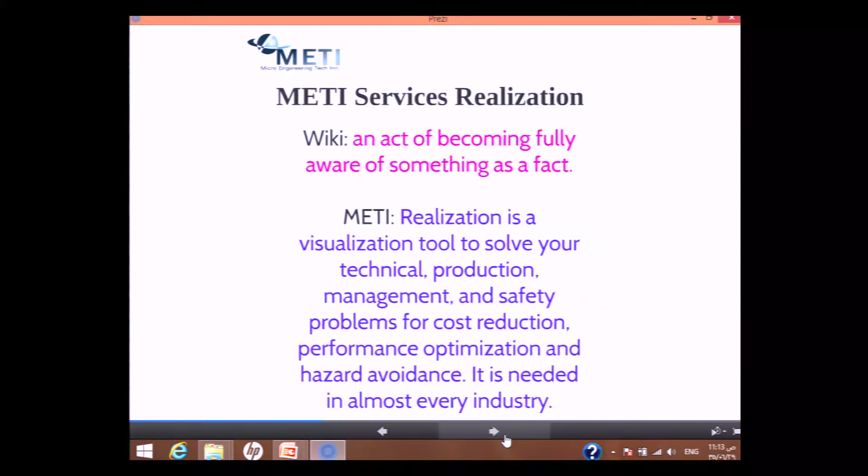So everyone is looking for mapping and data acquisition. They're looking for information, looking for facts. This is the reason we started thinking that the new trend in GEO should go in the direction of realization. To really do proper realization, you have to have the right knowledge, right tools, sensors, and accuracy. Going back to Optech, as Michael said, we're looking for accuracy from LiDAR and imaging. So METI's definition of realization is visualization to solve your technical, production, management, and safety problems, for cost reduction, performance optimization and hazard avoidance for your engineering projects.

In terms of industries, we are active and operating in North America, mainly Canada's West, Central and East, North Africa, and the Gulf area, and we already have existing clients in Saudi Arabia.

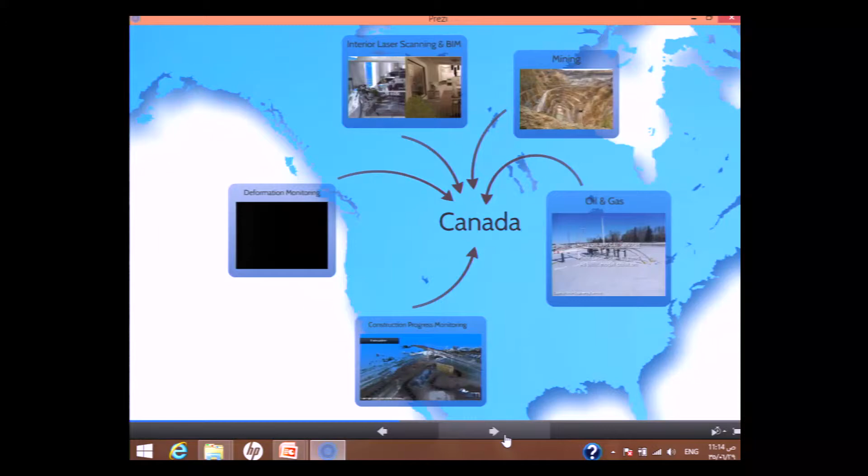In Canada, we are really focusing on five different industries: interior laser scanning and BIM, the new trend in interior design and architecture; mining industry; oil and gas; highway engineering; and monitoring progress, earthworks, and deformation monitoring.

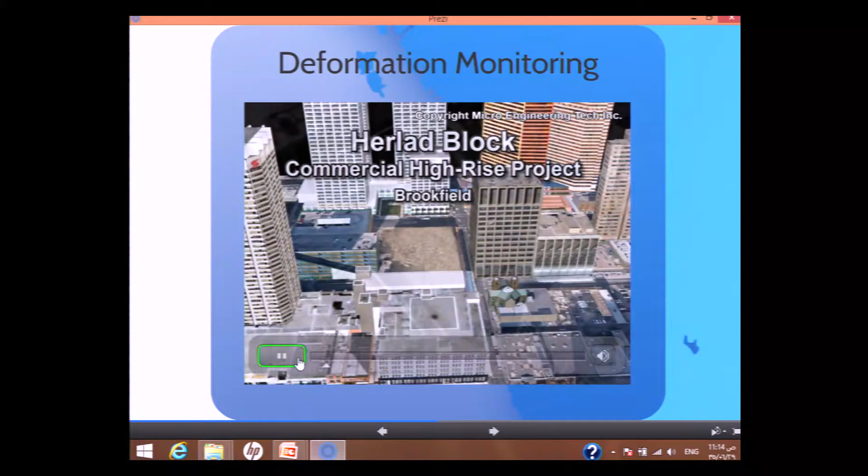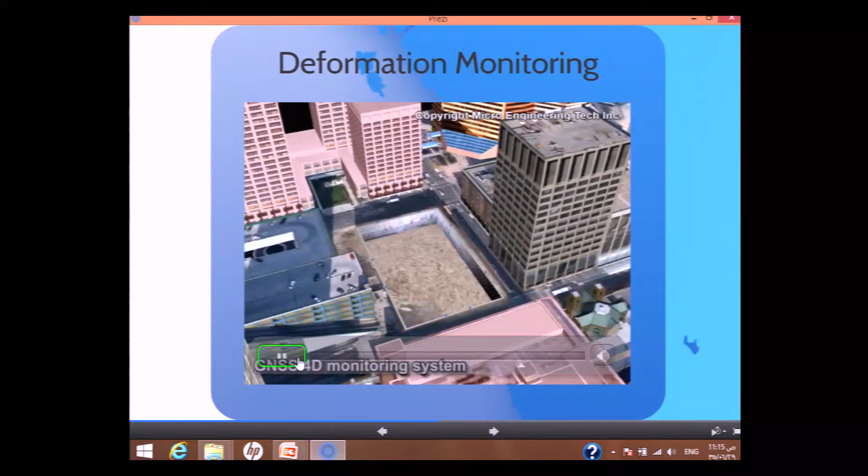I'll pick three of the industries we're involved in. Mainly, one of them is deformation monitoring for high-rise buildings. We are proud to be controlling and monitoring the highest 3 buildings in Western Canada. If you just Google the tallest skyscrapers in Western Canada, we were monitoring and providing precision engineering through integration of laser scanners, GNSS, geotechnical sensors, and robotics. This is one of the projects we are currently working on, Brookfield, 56 stories - a pretty high building in a congested area, downtown Calgary.

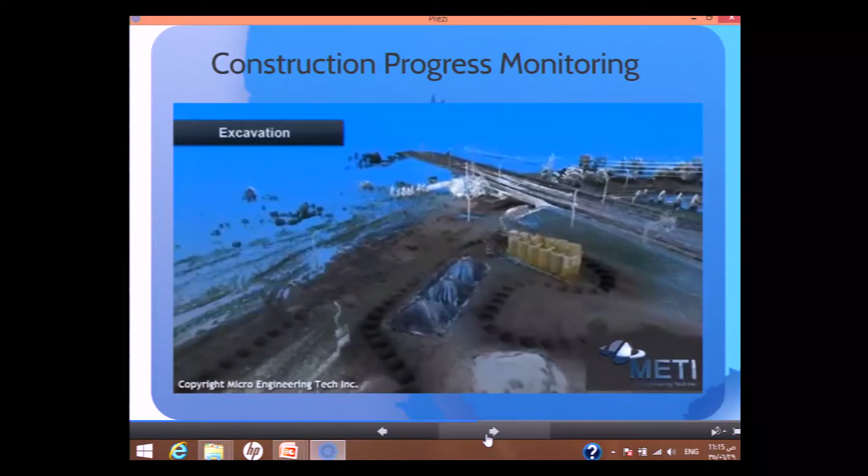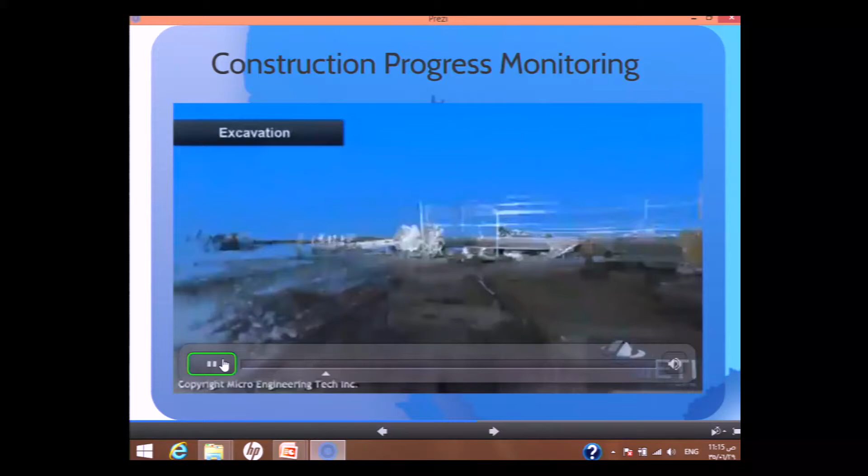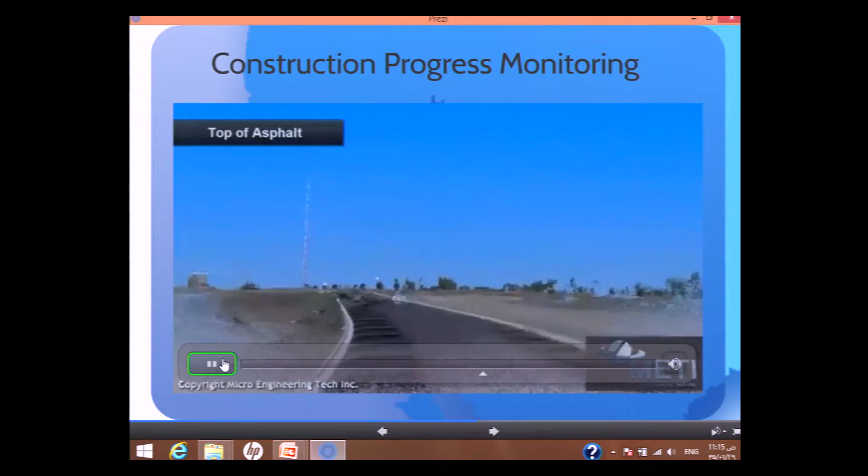Construction progress monitoring: last summer in Calgary we had a flood, and we had a really serious issue regarding downtown - it was covered by water. There was a lot of maintenance needed for the highway engineering and roads there. This is one of the LiDAR datasets we used for monitoring the progress of a project replacing the asphalt. Again, we're talking about realization, so the point cloud is fine.

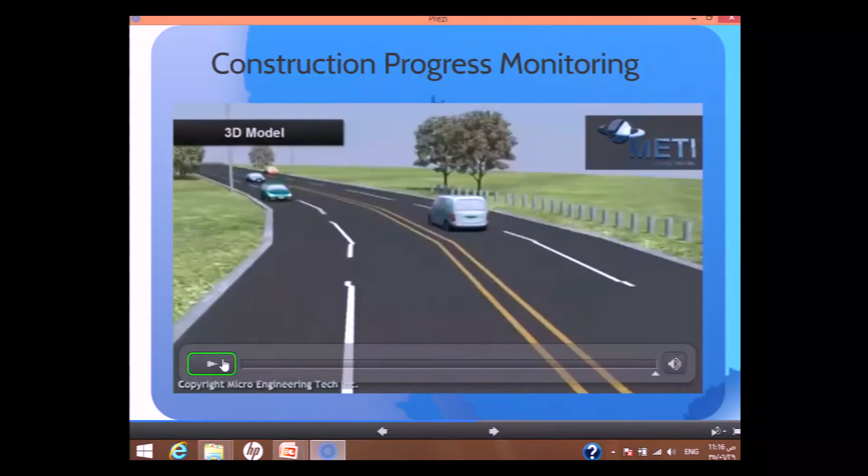Everyone can press the button. But you see here, cross-section, volume computations, complete reports for the client so he can really find the facts he's looking for realization. And finally, a 3D model. It's very important to say, engineering grade 3D model.

Oil and gas. Alberta's industry is very close to Saudi Arabia and the Gulf. Oil and gas is very important in Alberta.

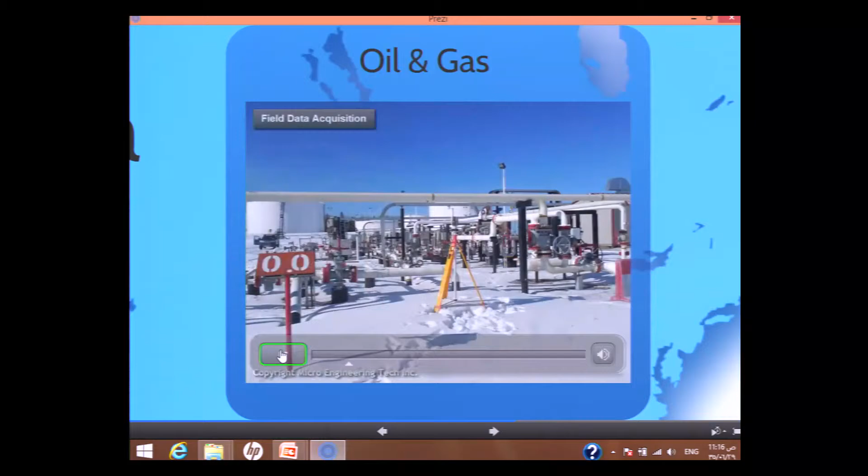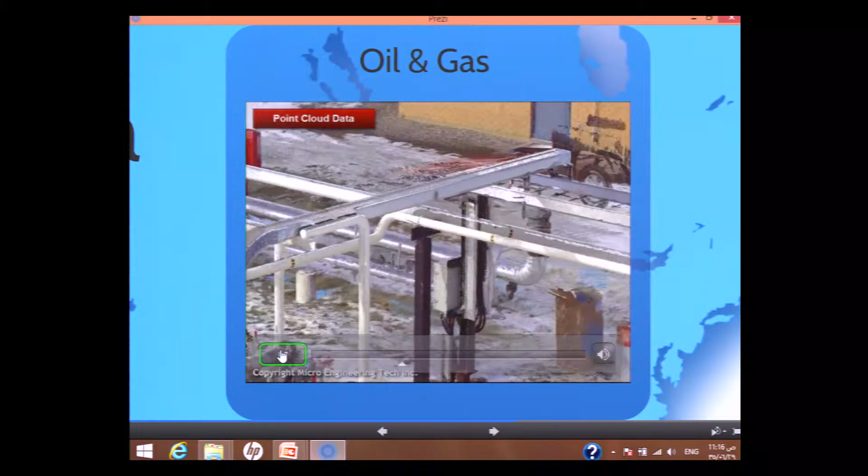These are pictures, and it's very important to follow these because just in a second, we turn to point cloud. This is point cloud. So you can really find the difference between colored point clouds and pictures. It's very close, so it's a very high precision point cloud.

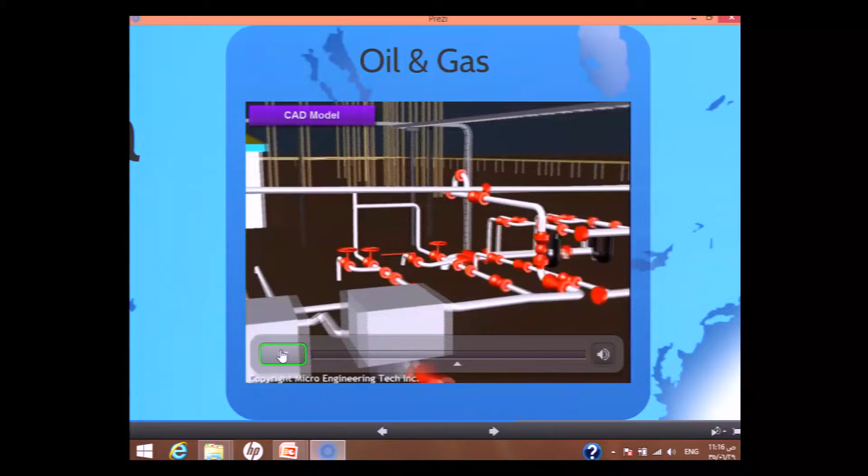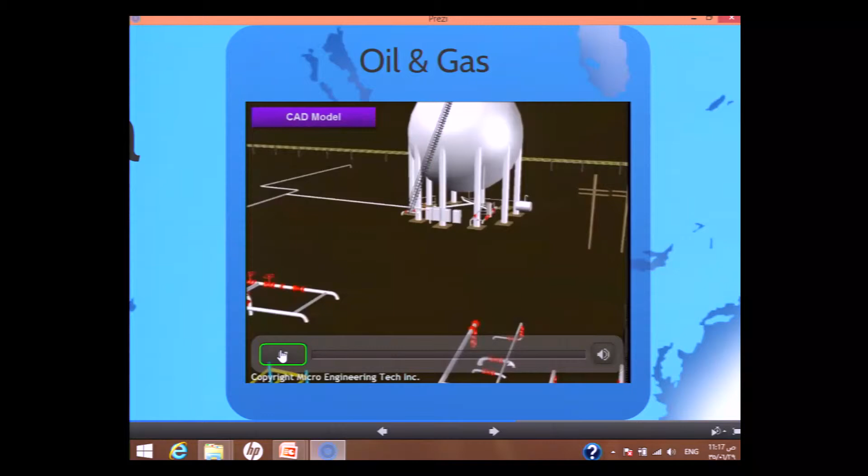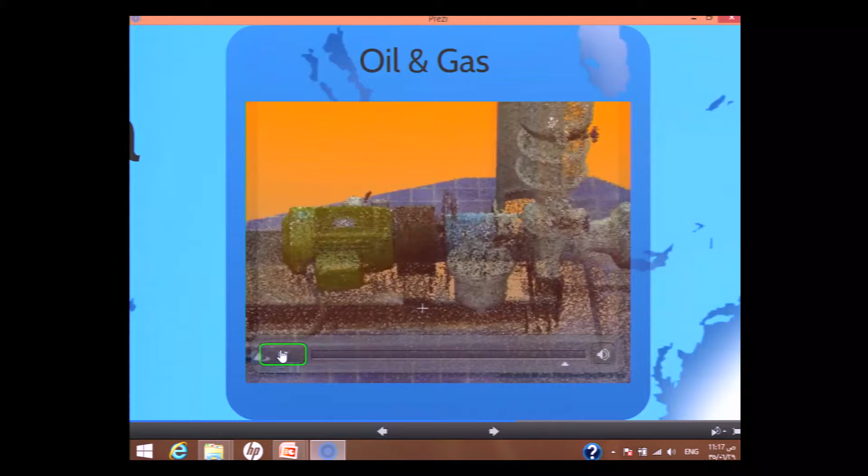PDMS, PDS, Smart Plant 3D, CADWorx, AutoPlant. So it's very important in both the oil and gas and machinery industry to be familiar with precise field data acquisition up to the production of a CAD model.

So we just moved to North Africa. As you see, we have done several projects for realization for archaeology and precision engineering. So I'll pick up the precision engineering project.

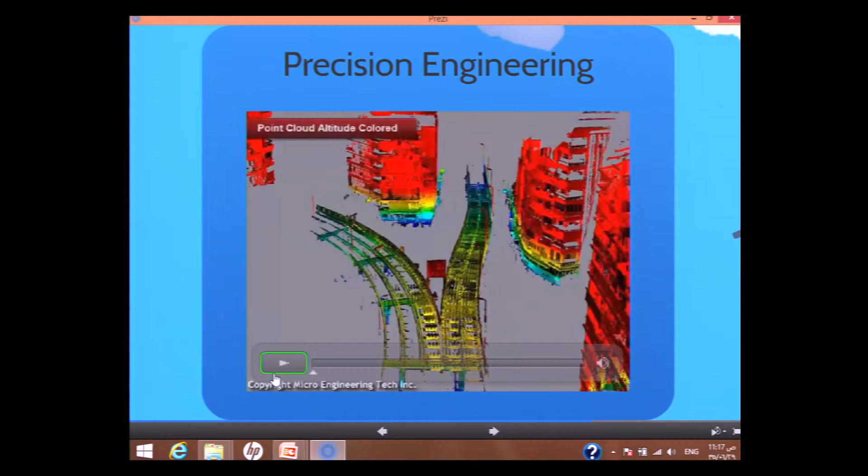It was with a Japanese company in Cairo. They would like to really have a train on this very old bridge. No drawings for the bridge. So we looked to scan this bridge and get complete steel detailed drawings out of it.

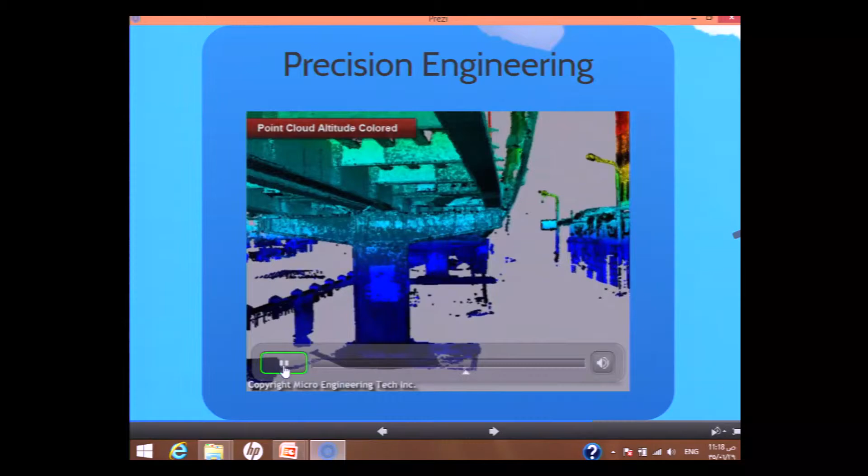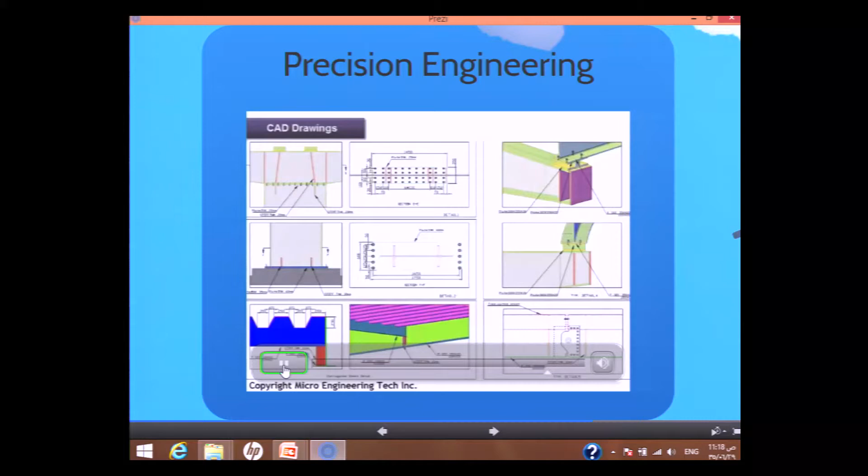This is the quality of the scan using the Optech Lynx scanner, and these are the drawings with an accuracy of almost 3 millimeters. Complete detailed steel drawings out of a precision engineering project for construction of a train.

Saudi Arabia. We have here two systems owned by one of our very important clients, Saudi Unicom. They have an imaging system called VISAT, which is a state-of-the-art imaging GIS system worldwide. Accuracy, relative accuracy, we're talking about 5 centimeters.

Unfortunately, we cannot show the data we have with our client because it's confidential. But this is a project we have in Canada, and you see here complete production, GIS production in 3D.

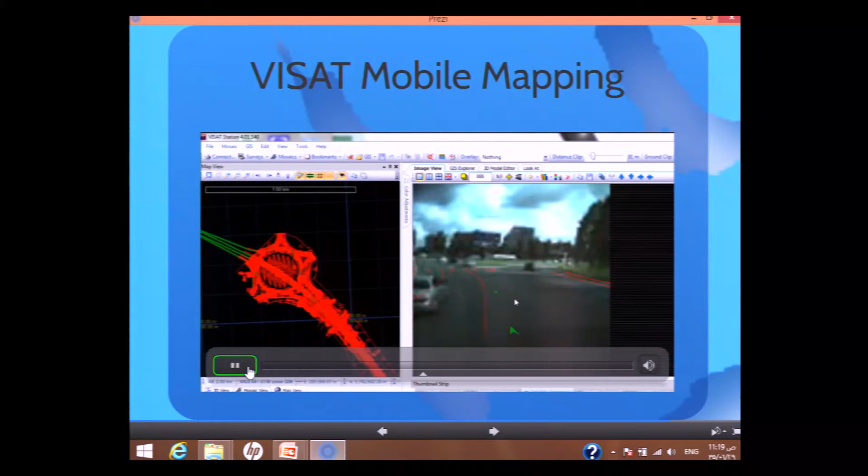On the right, it's the cameras with points, with attributes, ready for export in shapefile, compatible with Esri, Bentley, Autodesk. And to the left, you see the production, which is very important, complete 3D CADs. This system is pure imaging.

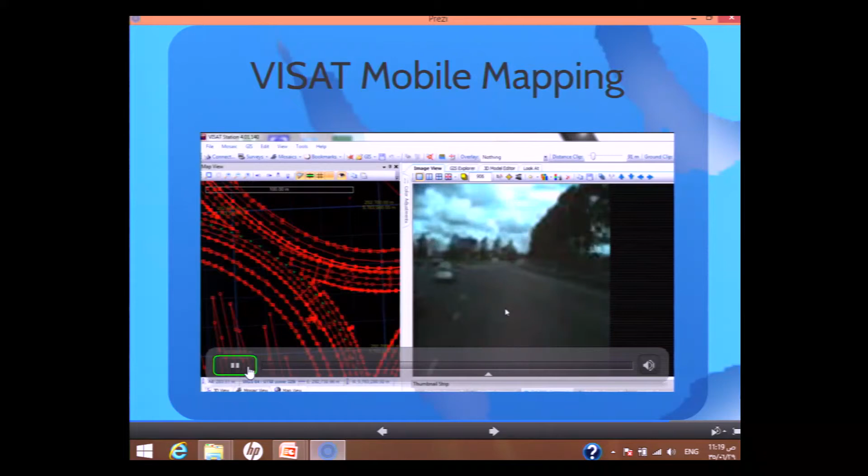This year, we're introducing the VISAT 2014 with integrated LiDAR. It's mainly to serve the industry in more into the depths or the third dimension, but still, we consider it an imaging system.

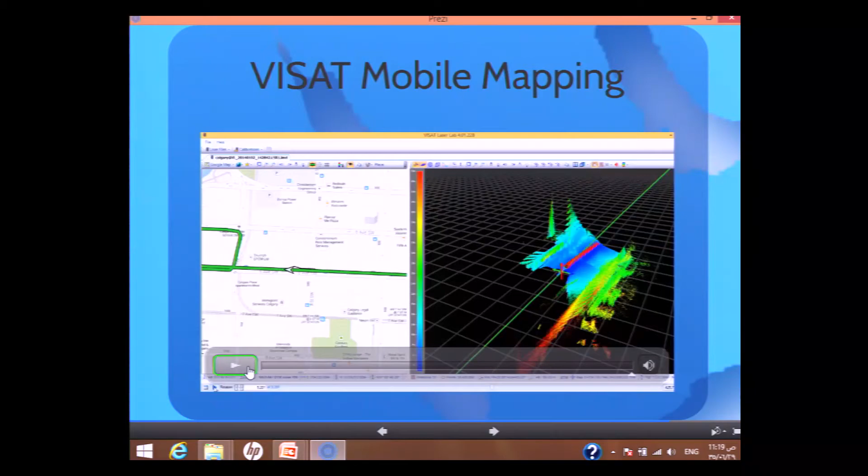And more important here is the data management. With imaging, you can run it really on any PC. So you don't need the high computational power compared to other systems.

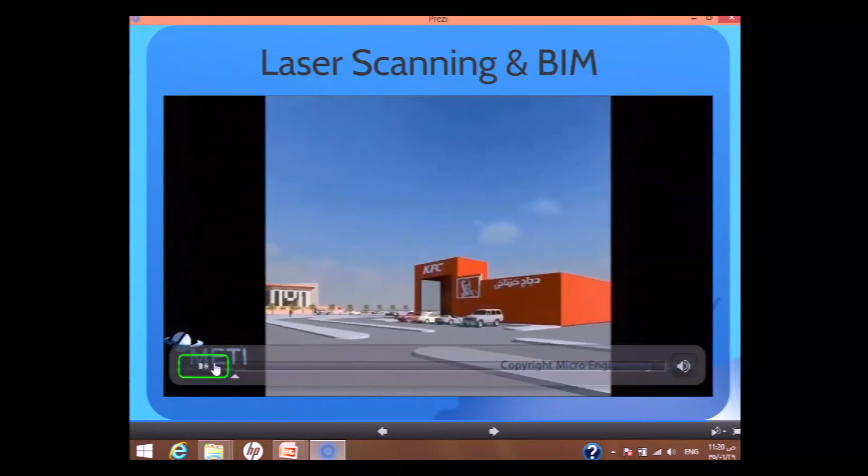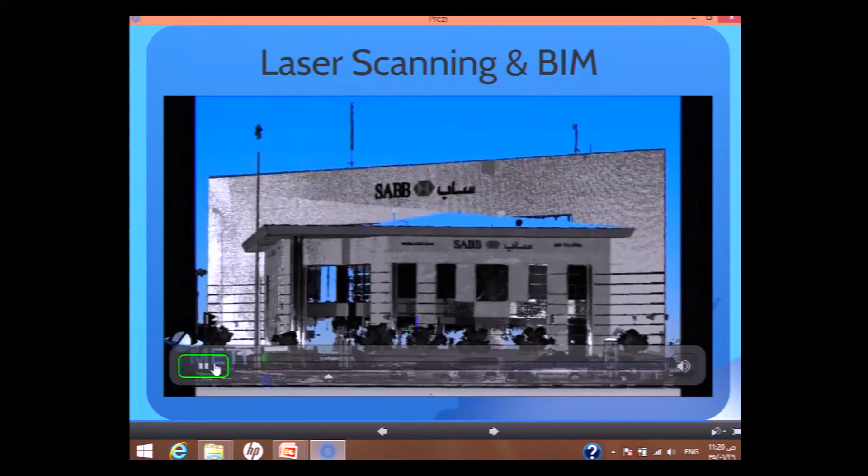Okay, last but not least, I think everyone here will be familiar with what we're showing. This is the area in Dammam around Sheraton at the sea. It's scanned, modeled. This is SABB, the KFC outside, not an ad for them. And this is the Sheraton coming up, where we're sitting, as you see here.

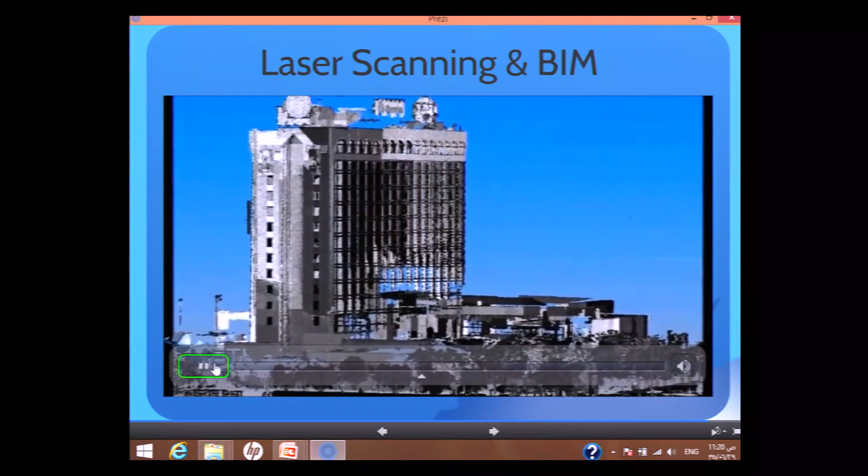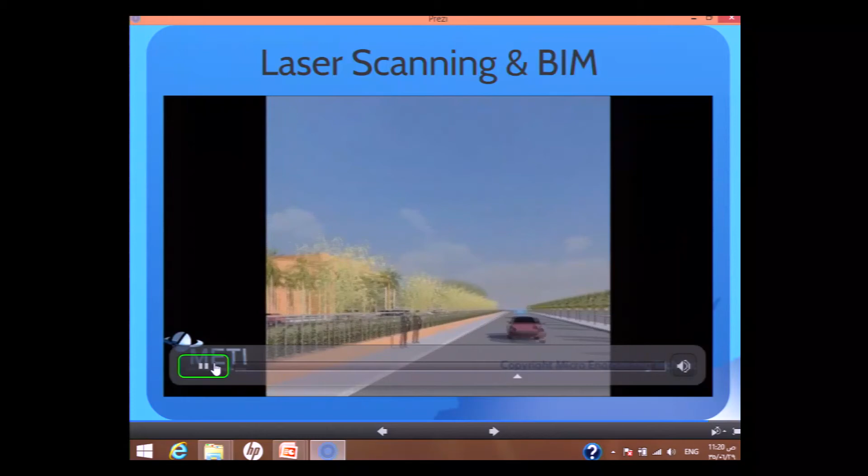Scanned with the Optech ILRIS, high precision scans, complete 3D modeling in both Revit and 3ds Max. It's a stop and go system. We have the ILRIS on a car, and this part is fully developed by Microengineering Tech Inc. So it's not a terrestrial system anymore.

It is almost a semi-mobile system. And as you see here, complete modeling for the Sheraton where we're sitting right now. This is really the value of working with Microengineering Tech Inc. and our partners, which is a turnkey solution for different industries through the geo market.